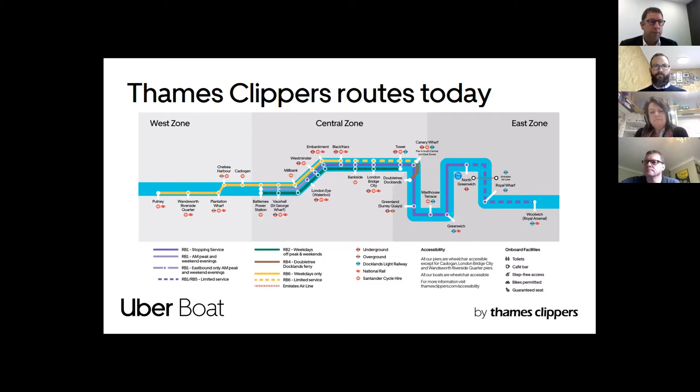The routing has grown over the years along with passenger numbers, and you will see from those early days to 2019 significant growth. All of that growth has come from investment, expansion of routes, and addition of piers. Probably the most significant growth was in 2006, when AEG acquired the business and invested in doubling the fleet. That quickly grew, delivering 2.5 million passengers by 2008.

The business then continued to grow through servicing additional piers throughout the routes I just mentioned. Probably the next most significant change was the introduction of RB6 in 2013, which spiked the numbers up again. The success of that route required additional vessels and capacity, which continued to drive those numbers up until COVID struck.

But nevertheless, when you look at the fact that we've pretty much not been operating for 7 months of 2020, I'm still proud of what we've achieved in that period, because we've been operating fewer services, less fleet, yet still carried a reasonable number of passengers.

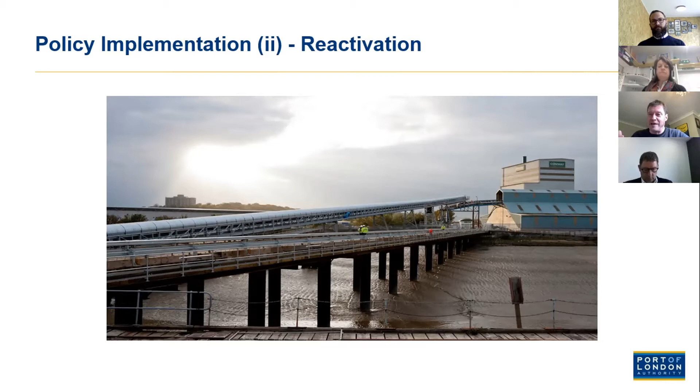So I think the first rule is it takes a long time to protect sites. The second rule is it takes a lot of vigilance and a lot of work to keep them protected and to get them reactivated. When it does happen, it's great, but it's a long slog.

And what we're now seeing, and again, you can tell that I do like moody screens and shots there and pictures. I also like aggregates as well, but moody pictures for slides.

We have two very large aggregate terminals in Greenwich. They handle between them getting on for 4 million tonnes every year. Road served, river served, rail served, the largest marine dredged aggregate terminals in Europe.

You can see the dome there in the distance. So these are effectively on the east side of the Greenwich Peninsula. But again, because of the major regeneration of this area, we are faced with encroaching development near to the wharf. This isn't a direct attempt to acquire the wharves for alternative development, it's actually the juxtaposition of development on working wharves.

And this is perhaps the third, and in some senses the most pernicious thing that we're seeing in terms of wharves: how we deal with development next to working terminals that, like these wharves here, work 24 hours a day, 365 days a year.

And if people are aware of nuisance laws and statutory nuisance in particular, there is a major issue of people living next to the river. I get a lot of emails that usually start, 'I love living next to the river,' and you always wait for the but, and that but always comes, and it tends to be, why do boats have to go up and down it? They make noise, or it's annoying me that you hear noises from these terminals. Why, you think, you know, you live next to a river, but anyway, I won't go down there.

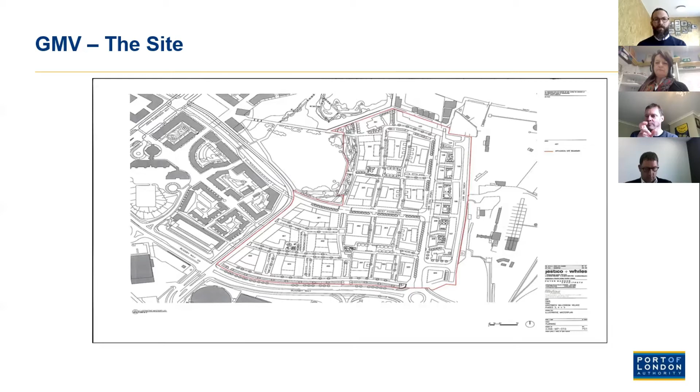And it took a fair bit of work. It actually started with us threatening to judicially review the local planning authority who just granted planning consent without looking at this issue in any detail.

But when they naturally and understandably climbed down, we then started looking with the developer, with the local planning authorities, particularly the environmental health officers and the terminals, at how we could actually treat the frontages of these developments in order to ensure that we didn't have that opportunity for complaint. It was a collaborative process, and it took a long time. Of course, anyone who's involved in planning knows that glaciers move quicker than the planning process.

What we came out with was a very simple solution, which was to effectively keep the residential living areas away from the frontage, look at how we fenestrated the frontage to the wharf, and keep the common parts and service areas towards the wharf, getting the scheme to look into itself and away from the terminals, though still to the river.

This took a long time, and obviously a lot of haggling, because it's a very nice view downstream to the Thames barrier and the river. That was something we didn't want, because of the opportunities for complaint, particularly from habitable rooms, bedrooms, and living rooms. We also looked at how we dealt with purge ventilation, keeping windows closed, which comes as quite a shock to developers, but ensures that through closed windows and fenestration, the opportunities for noise, particularly at night and in summer, were limited.

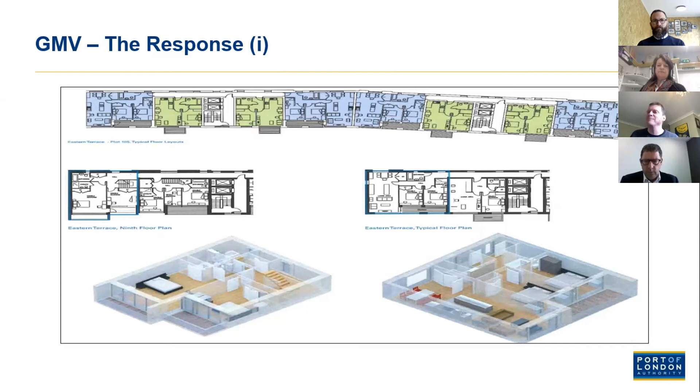This finally is, at the bottom there, the drawing of the fenestration towards the wharf. So still keeping an active frontage, but one that behind it really had lots of corridors, plant, and working areas to the wharf. So we've maintained that juxtaposition, but not in a way that just has a very dull flank wall, because we're not looking to close the wharves off from life, but to make it interesting. I think this is the end.

From my experience over almost 22 years of dealing with these, it's a long process, it takes a lot of time and a lot of effort. The PLA invested in a planning department - there's only 3 of us - so that we can actually engage in planning. Because if you don't engage in planning to make these things happen, things will happen to you.

Particularly on any river where people want to live, they like the river, but they might not like it the way that you like it. And you need to get involved.

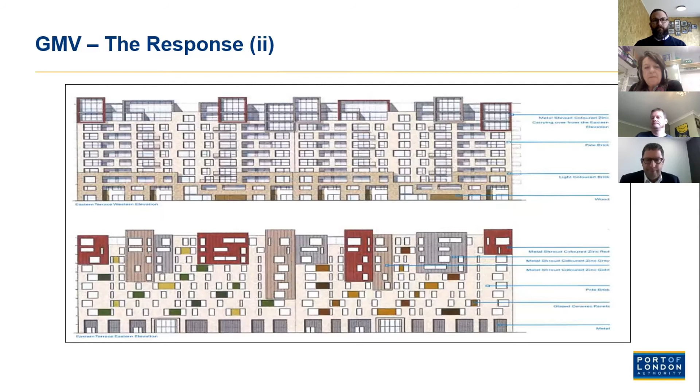Thank you so much, Jane. Absolutely fascinating. I think we'll have so much to learn from you in terms of the Clyde, where our riverfronts are being eaten up by housing developers and all our infrastructure is disappearing. Thanks very much for that. I'm sure there'll be lots of questions in the chat once we've heard from...

Okay, so just very quickly for those that don't know ABB, we're a multinational technology company that provides products and systems largely around electrification and automation. Very sizable company, and sort of on a competitor level with the likes of Siemens and GE amongst others. But we have a large product portfolio, but then we integrate that with direct systems for end users, and I represent our marine and ports business, which is one of 18 divisions within ABB.

One of our big focuses within that is we're focused on meeting IMO's goals of halving greenhouse gas emissions from ships by 2050. But that's requiring comprehensive and proactive response from the maritime community. But we believe shipping is well positioned to take concrete action by choosing to implement the correct technologies that provide the reduced fuel consumption and lower emissions.

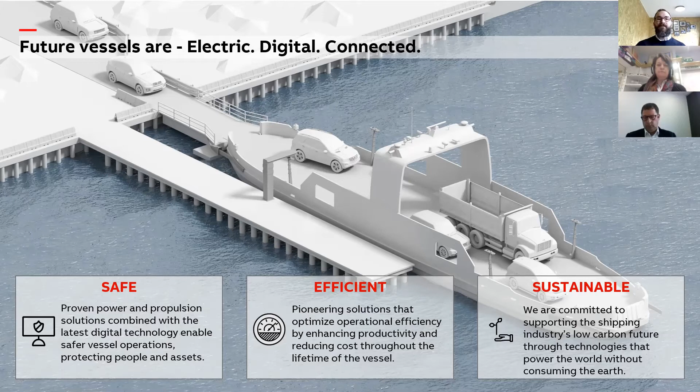Now, ABB's technologies are redefining the future, and we believe bring new levels of reliability, efficiency, and sustainability. But we believe that shipping's future is electric, it's digital, and it is connected. The electrical backbone is integrated with automation and control systems, and is already transforming the industry with truly collaborative and automated operations. Digital solutions on board the vessel transmit data in real time and give comprehensive overview of the ship's performance to teams on board and ashore. And connectivity makes it possible to exploit advanced analytics that feed into tools for energy efficiency and maintenance optimization. So that's a little bit of an overview of our sort of global approach.

But onto the project I've been asked to speak about today, which is 10 new vessels for 3 different routes in Lisbon. The main driver for this was they were to be fully electric and fully battery operated. Now, this is capable because of the size of the vessels we're looking at here, which are around 40 meters long. They're twin-hulled, fiberglass construction, capable of carrying up to 540 passengers.

Okay, as batteries discharge in DC, it makes sense to utilize DC distribution to avoid the extra weight, space, and cost of that energy conversion. So we have a number of products and systems that showcase DC, including Onboard DC Grid. However, as these vessels are quite sizable and have head clearance, which is because of our product portfolio and how things fit within space envelopes, that was a key factor here and allowed us to use the more generic system.

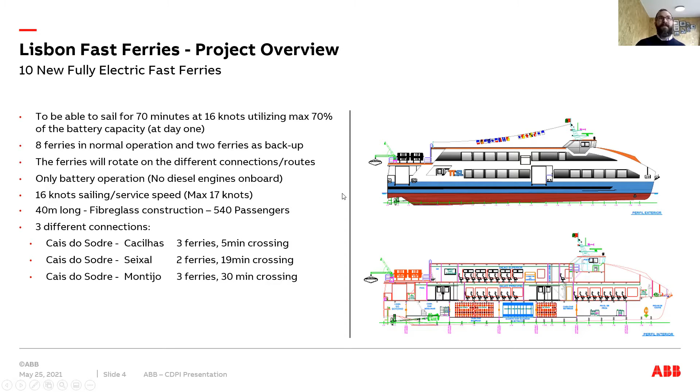Okay, very sorry, I've had to actually redact at the very last minute some of the drawings, because when I realized that we were being recorded today, there was a little bit of IP in there which I'm not allowed to fully share. But ultimately, we're driving 2 permanent magnet propulsion motors, 1 on each side, and there are 30 62-kilowatt-hour batteries, 62 kilowatt being about average typical size for a current EV car. So basically 30 cars worth of batteries in each vessel.

Our overall scope is wrapped up around an automation package. So we have the power energy management system, we have a wider vessel management system, thruster controls and joystick controls. And then on the wider hardware front, we have our DC grid switchboards.

We have hotel transformers with filters. So this allows us to convert back into AC to do local distribution for lighting and onboard services. We have the permanent magnet propulsion motors. We've supplied the Corvus Dolphin batteries, Corvus being one of the largest battery manufacturers in the world.

But where we sort of start is we start and we do the initial sizing of the batteries, the capability, look at some of the chemistry options, look at those weight parameters, how we could configure those, and then we work with the battery suppliers into the detailed design.

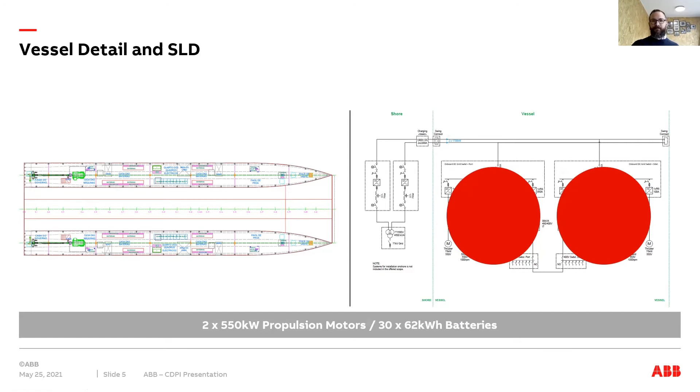Okay, so a little bit more about the routes. Apologies, my pronunciation will probably be quite offensive for the names of all the terminals, so hopefully I don't offend anyone.

Ultimately, they are all serving in and around the same terminal in Lisbon, and you have 3 different crossings from the colours there: a 5-minute crossing, 27,000 trips per year to Cacilhas; 7,900 trips on a 19-minute crossing down to Seixal; and then the longest crossing, and the most challenging therefore for the battery sizing, is the Montijo, which is just short of 7,000 trips per year on the half-hour crossing.

It is that cycle time that is the problem, because we've got these 3 different routes, with 3 very different operational profiles, affecting that cycle time and the charging implications that run with it. It's that whole operational balancing act that needs to take place around speed, size, battery sizes, and the technology considerations. One of the parameters here was that the batteries had to be able to operate for 7 years, so you have to juggle that entire balancing act.

Now, the big way we saw this going forward, and the way around this, was that you could look at a different vessel for every different route, which has a different battery size. But then what happens if you have a failure and you have to move one vessel from one route to another and it's not physically capable of doing so?

Okay, so one of the other key considerations is the actual space envelope and the infrastructure you have, especially when developing existing infrastructure. This is the main hub in Lisbon, a hugely congested site, with 3 separate floating jetties which serve the 3 separate routes. There are a number of challenges that have to be overcome here.

First of all, each of these is a floating pontoon. They are class registered and have to be docked every 5 years. There isn't currently a spare, so that means you're having to put 3 routes across two of the jetties, which, when you then have to do charging cycles, could have an impact on your operations.

And just on the land side, as I said, we could potentially require 3 charging stations here, which could mean up to 6 mini substations doing all of that power capability that's then driving to the shore connections. That land is very, very tight, and it's going to have to be either built up or taken out of some of the existing requirements.

Now, these are the 3 destinations or embarkation points. Ultimately, very similar to Thames Clipper, this is part of an integrated regional transport infrastructure. It's deemed almost part and parcel of some of those routes, multimodal and connected, and each of them has its own challenges, or not.

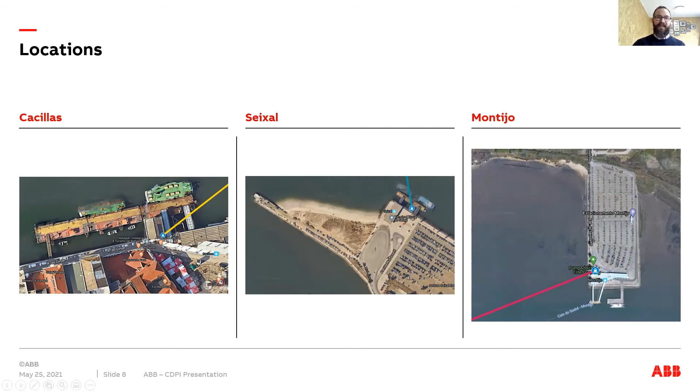It's worth noting that this project has moved forward, we're on contract, but not all of these wider challenges have necessarily been resolved and are still in work in progress. So it's certainly something anyone looking at a development should consider, knowing how you're going to get your solution fully covered off.

Mention the charging system - the selected company is called Zinus. They currently have a number of installations. The one here on the left, we've got infrastructure on board this ferry, I'm not even going to attempt the name of it. This is the charging box, remotely operated, because these are LV solutions the cables are quite large, very heavy and cumbersome. And because of the standards used now, there's multiple cables - it's not just a single cable being handled on board for each connection.

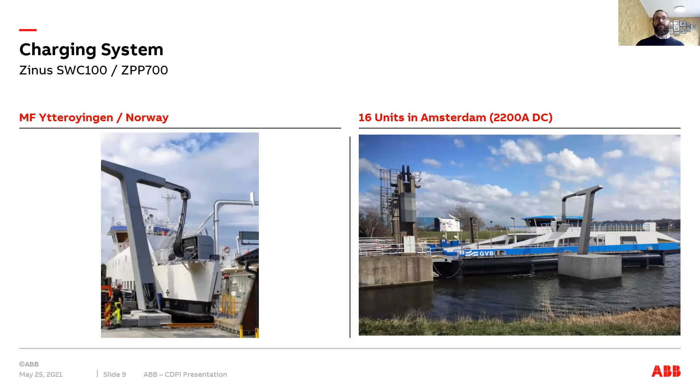But this is about trying to charge as quickly as you can, so these systems allow a pretty quick connection. We've done other solutions where there was a very short crossing with only 2 or 3 minutes of charge time, very similar to the Gosport ferry down in Portsmouth, that kind of very quick river crossing. In that implementation, we've actually used robotic arms connecting to the vessel with the shore connection prior to it actually being made fast alongside, to maximize that time.

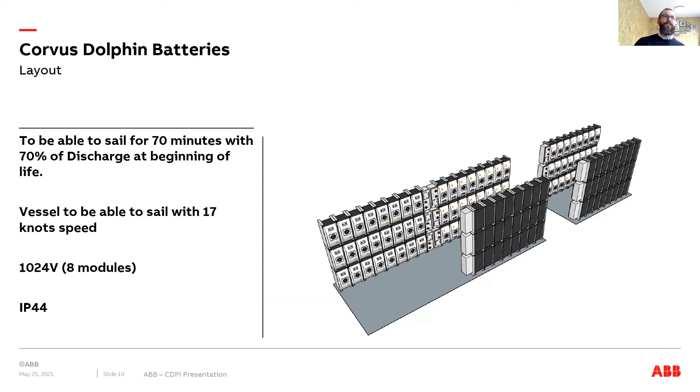A little bit more about the battery lineup. In one of the first slides I showed, we had some forward and some aft in each hold. There are 5 pack arrangements altogether, 1024 volts in 8 modules per setup. These are IP44 rated, and a lot of consideration has to go into their arrangement because of the weight that Sean mentioned earlier. There's a sizable mass being put in the hull of these vessels, and a lot of considerations need to take place.

Again, this is possibly the biggest challenge - maintaining the capability of the batteries and not damaging them. As we said, we want to operate at 16 knots for 70 minutes with the batteries between 90 and 20%. We never want to top them up beyond 90%, because you're then damaging the battery and it's much harder to ram that energy in there, so it's really not as efficient.

But to maintain this, what we're looking at for sizing is that we don't want to discharge more than 25% of the battery at any one time. 20% is about ideal, 25% is the maximum. So if we were to do much bigger dips down, we would be shortening the life of the battery exponentially. So this is the main dimensioning factor.

The other thing is then about the charge time - we've been given a maximum of 10 minutes charging for the longest crossing. So again, that's a lot of the design work that has to go into that, is how you're going to make that work.

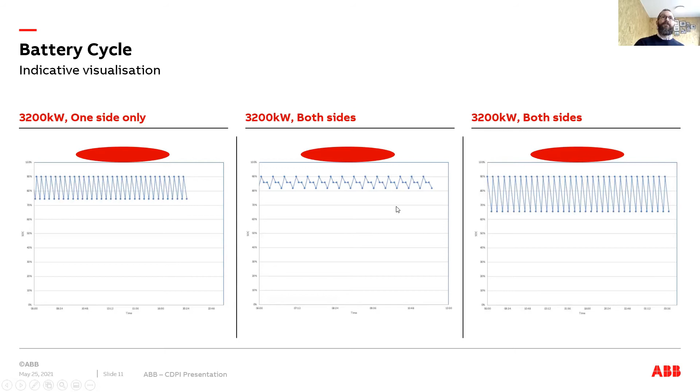So as I said earlier, we're going to cycle the vessels across so that none of them are experiencing this large, heavy discharge that you see on the right-hand side here. And as they cycle around, they'll be able to be maintained a little bit better.

Okay, and very quickly, we are obviously not building these ferries - we are providing power and propulsion systems. Our systems will be integrated with a company called Gondán within their GRP division. They're a Spanish-based builder, family owned in their 3rd generation. They have 2 yards next to each other, a very traditional shipyard and one which is GRP specific, where they have about 50 employees, and they've been building fast ferry catamarans for around 10 years.

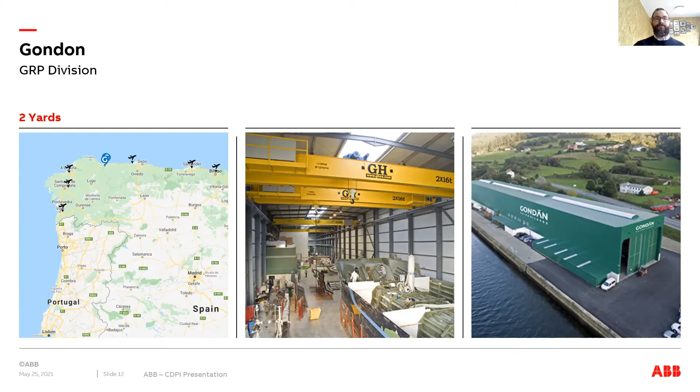So some very, very exciting times. There's a lot of fantastic technologies out there that are available and can be implemented in all manner of configurations. It's just about looking at it holistically and understanding your goals and objectives and what you want to achieve.

And that's me. Wonderful, David, thank you so much. Those look beautiful - they're beautifully designed as well as being sustainable.